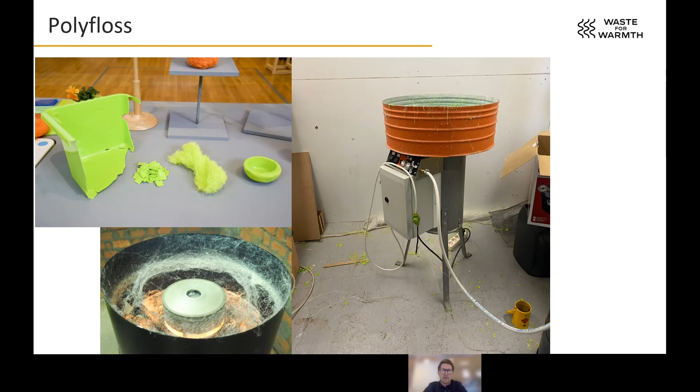So between these 3 NGOs and the company, the Polyfloss Factory, our challenge is to further develop their machines and also to make a safe-to-use plastics-based insulation product that can be integrated with existing tents and structures, and to set up a sustainable local production of this, creating work opportunities for displaced people in the field, and also tackling a local waste problem.

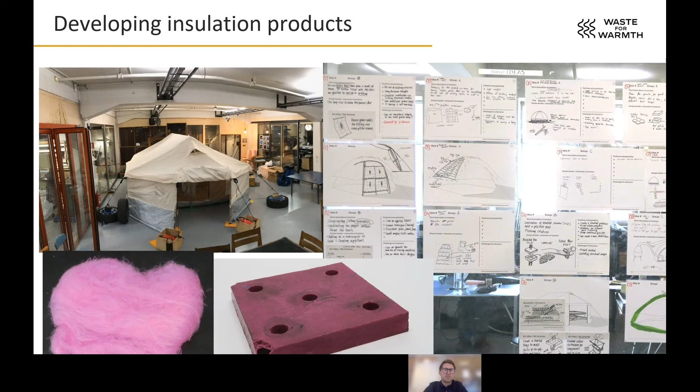So we work to make this happen on a range of fronts, and one of the challenges we faced in developing an insulation product is getting our heads around all the various standards and safety measures we need to comply with when introducing this product into someone's living space. And that's even just for testing.

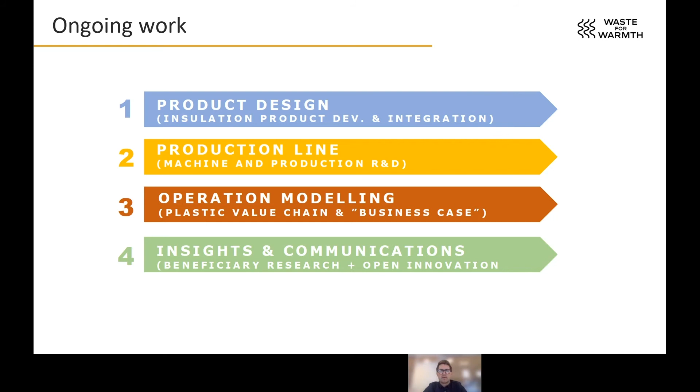So here's David. David is a volunteer on the Waste for Warmth project. And to deal with project requirements from early on in this project, he spent time mapping the relevant standards and setting targets for product performance and technical requirements, just on a range of different variables. So he's been instrumental in providing our product development with clear targets.

David will give you a lot more detail on how he's worked with this, but he's also a returning Engineers Without Borders volunteer, and he will also tell you a little bit about some of the previous assignments he's been involved in. And with that, I'll just hand over the word to David Osborne.

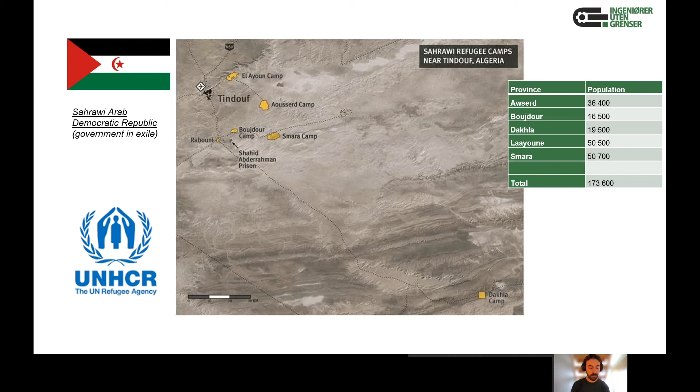Here is the location of my first assignment in the Algerian Sahara. We spent 10 days visiting refugee camps that had a failing waste management system. Especially visible and problematic was plastic pollution. The UN Refugee Agency, who were supporting these camps, needed technical help from us to find a solution to the waste problem there.

So here you can get a sense of the situation around the camps. The support from Engineers Without Borders resulted in a solution to recycle plastic locally, according to established machine designs and a sustainable business model. This would then relieve the burden on the currently overstretched waste collection and disposal system.

The second project I'm actually currently involved with is a project sponsored by the Norwegian Technical Union, NITO, and was conceived by NITO students. The aim here, based in Tanzania, is to install machinery and help set up a sustainable business to clean up a stretch of beach just north of Dar es Salaam. Engineers Without Borders, together with a group of students from NITO, will be providing hands-on support on the beach site to set up this business.

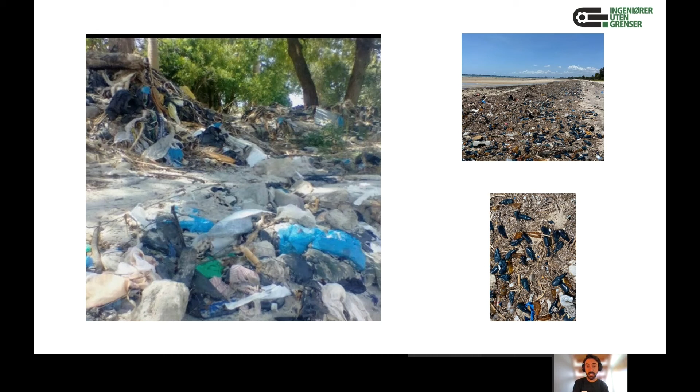And now we go on to Waste for Warmth, the main part of this. So when I started the Waste for Warmth project, we understood that polyfloss was a very promising material with respect to thermal insulation. However, what we were not sure about was the range of other properties and functions that had to be fulfilled to make sure that this was a safe, strong, and durable material for using it in emergency shelters.

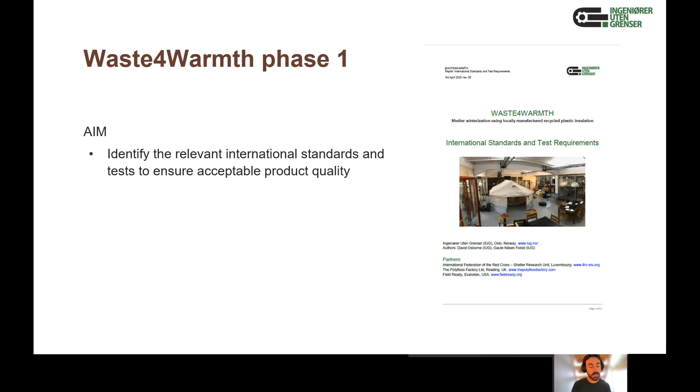The first phase of the work was therefore to list out what properties we needed to design for, and also the methods that should be used to test and verify said properties are acceptable. So in the beginning, we identified the obvious ones, so fire resistance, strength, and weight. But as we looked further and further into this, we discovered quite a number more.

To add to the complexity, we had to consider various concepts that we had on the table, so how polyfloss would be applied to the tents. We had one concept, which was stuffing in the sleeping bag, or else as panels on the tent walls, as floor tiles, and also as a complete tent liner. So each of these concepts would then need its own set of standards.

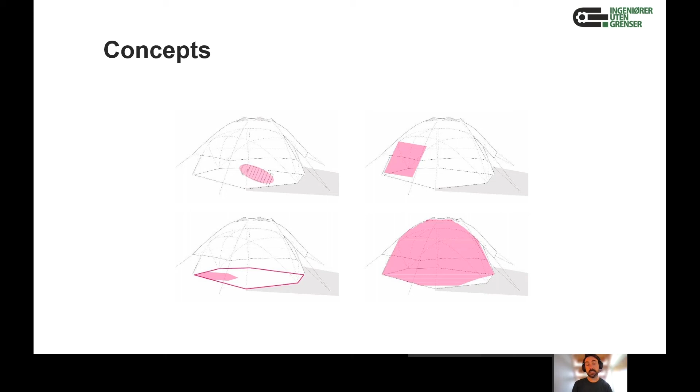For example, moisture permeability in the sleeping bag is a desirable feature, so you don't get water build up in the sleeping bag. But when it comes to floor tiles, you want to have water impermeability to make sure that you don't get the floor mat soaked with water and lose its thermal resistance.

So a big challenge for us is that there exists no one standard for a relief tent. It's up to the relief agencies themselves to list their own set of required properties. And to verify these properties, they refer to standards and test norms detailed in international standards, such as the one on the right here. These standards are typically adopted from the building industry and from textile industries, and also from the recreational tent industry.

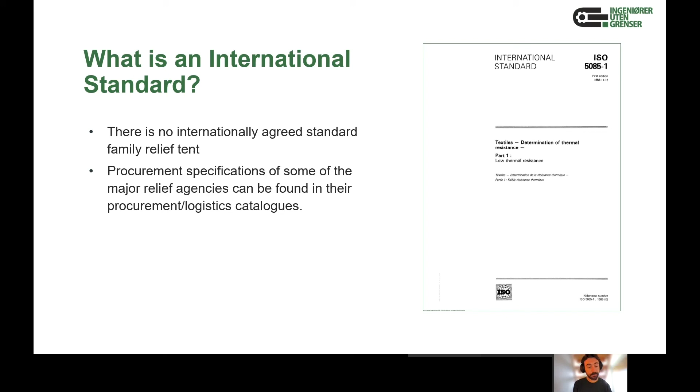So the relief agencies themselves detail their own emergency shelter properties specifications in their product catalogues. So these catalogues were the main source of information for us when making the list of specifications for the Polyfloss product.

Another challenge for us was that there are no current products exactly comparable to Polyfloss. So we had to then combine specifications. So for example, we would combine the specification for standard relief blankets with tent liner specifications.

So let's look at an example of one property, fire retardancy. This is an extract from the Red Cross's specification for the relatively new geodesic family of relief tent.

The geodesic tent specification also lists other required properties, but this property, fire retardancy, is probably one of the more critical. So here you see the property, flame retardant, and then it's given an international test standard that it has to be tested against to qualify the property, EN 13823. Then you have minimum acceptable results from the testing. Tests like these are normally performed on a cut sample of the product or the liner.

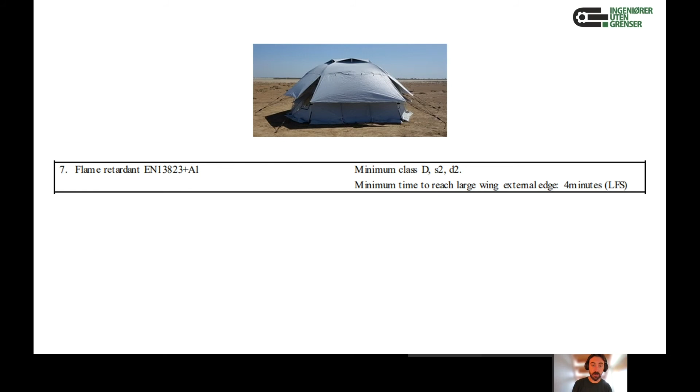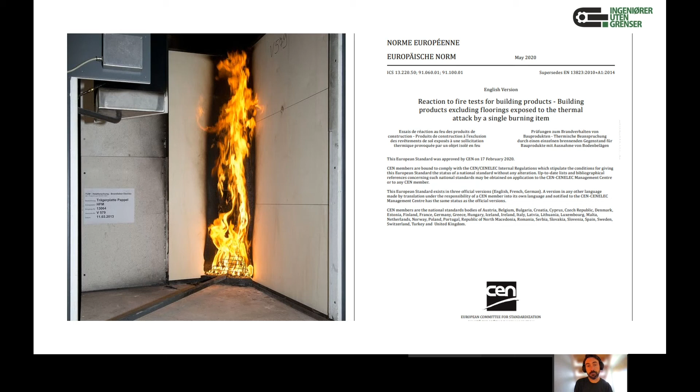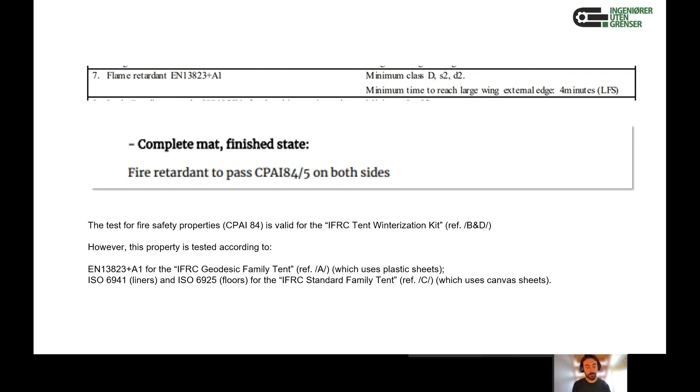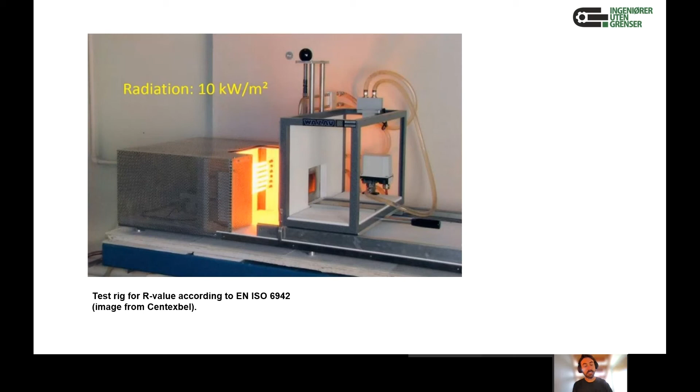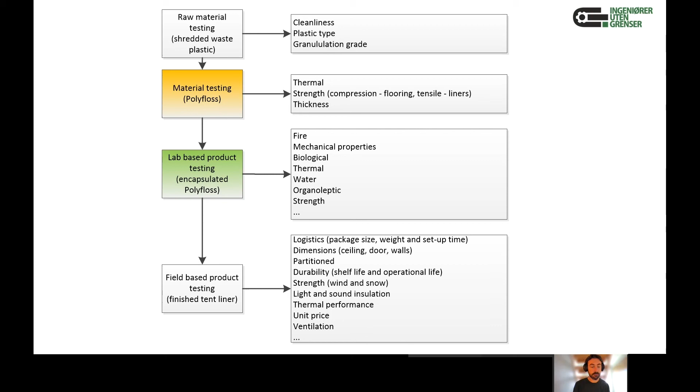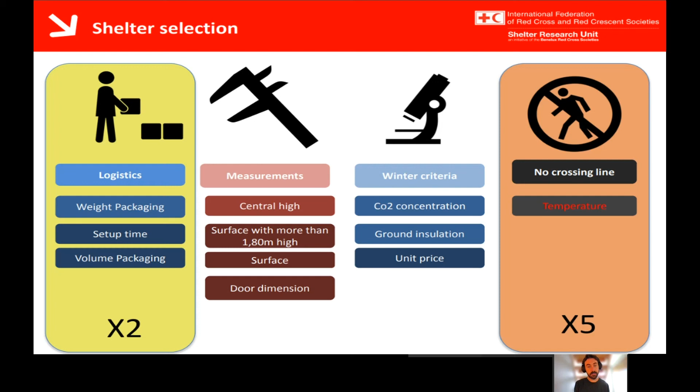So in the end of the first phase, we had compiled well over 100 individual properties that needed to be considered for a well-functioning relief tent. In phase 2 of the project, where we currently are today, we are working with the Red Cross to narrow down and prioritize this overly large list. Our aim now is to have a simple specification for wall panels, for floor mats, for sleeping bag filler, and for any other product form of polyfloss.

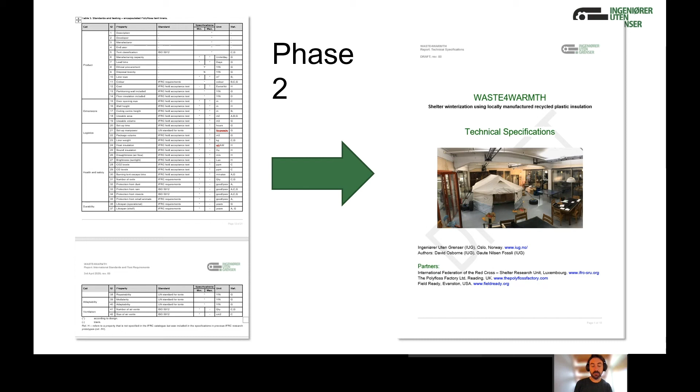So to make it simple, the specification will be structured according to 4 basic categories. The first category lists the product specifications and ensures basic HSE requirements. So things like color, the size, the weight, and that it's clean and safe to use for humans. The second is detailing all the lab tests that need to be performed to ensure acceptable quality. This would include the tests like fire resistance, strength and durability.

The third category is basic design requirements. So things like making sure that all the seams are not horizontal, that there are a sufficient number of windows and ventilation openings. The final category covers the behavior of the complete tent in the field. For example, how long does it take to set up? How long does it take to dismantle? How does it cope with wind, snow, and of course, how warm it stays in very cold climates.

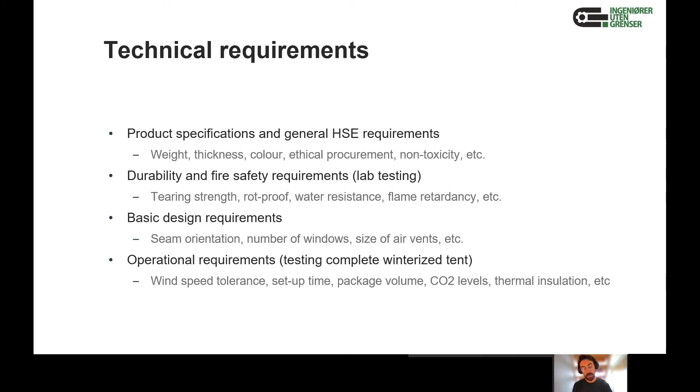So here is an example of a table that we are currently developing for the previously mentioned second phase lab testing. This is our main focus at the moment, and we have listed the properties, the test standards, and the minimum acceptance values for Polyfloss. So over the coming weeks, we'll be making a priority list of these properties for each of the product forms so that we can start to test and basically further develop the design.